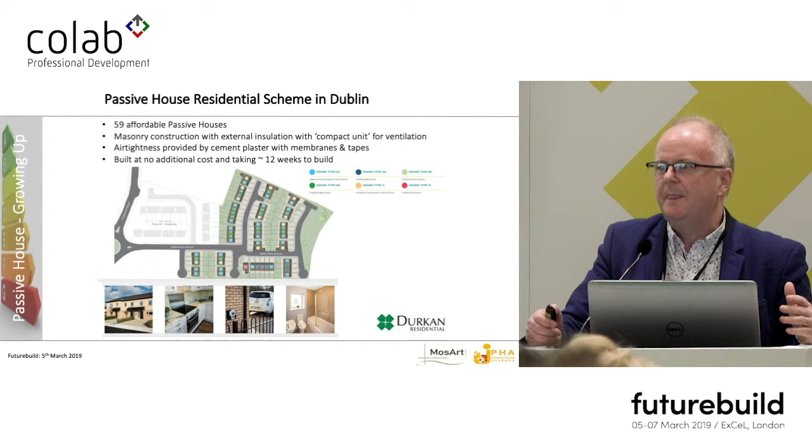And this is another scheme that we've done in Dublin. Again, what we're finding now is the developers are actually getting on board, and the developers now see this as a kind of prototype or model that's appropriate for their business model.

But what I'm really here to talk about is this Cornell Tech Tower. It's a 26-story passive house student dormitory in Manhattan. It's a very iconic building. It's in the middle of Roosevelt Island in the East River, so it's in a very prominent location.

The architects were Handel Architects, and the developers were Hudson and Related. You can see everybody listed there on the right-hand side.

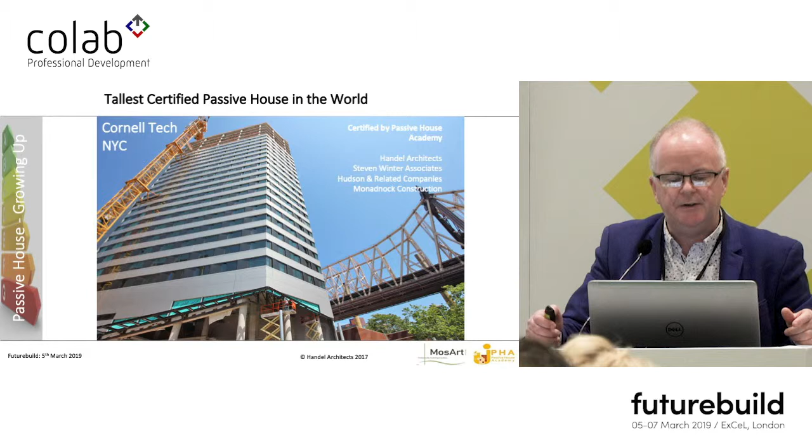So it's a 26-story building, 352 units. Some of these units are very, very small because it's a student dormitory, so you can imagine the accommodation in Manhattan per square foot is very expensive. So there's a good variety of sizes. There's an amenity floor at ground floor and also at the top floor, but otherwise in between they're all apartment studios and one bedroom. The 3-bedroom apartments are used by college staff.

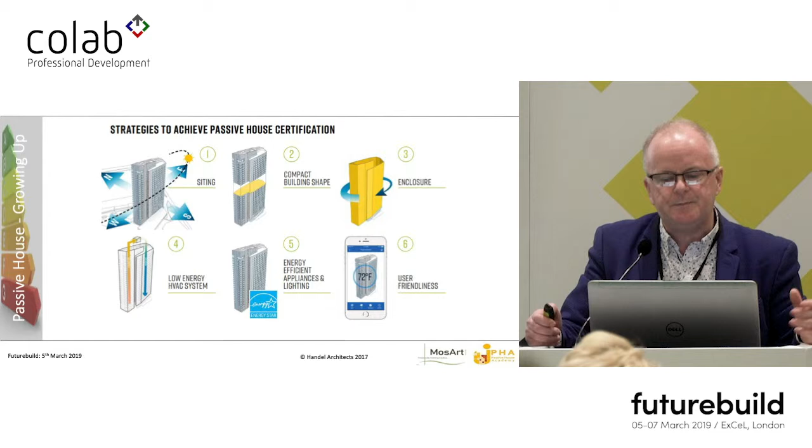A lot of you will appreciate the key facets of Passive House. Passive House is really all about the envelope, having a good form factor to reduce the amount of exposed surfaces as much as possible, and I'll go through these factors in my presentation.

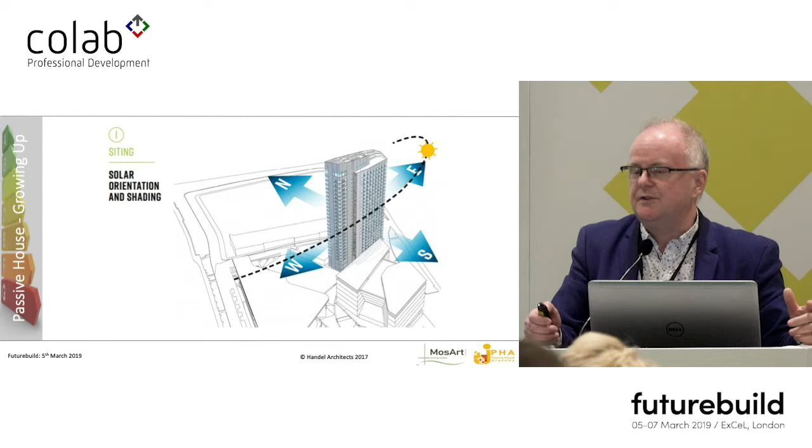Luckily enough, the island on which the building is built allowed for a southern orientation, so the widest axis, the front of the building faces south, and the east and west facades are quite narrow in width, so that's good because east and west present problems for overheating typically.

If you think about the surface area of your own home, if you live in a single family home, you have 6 surfaces through which heat loss takes place, whereas in an apartment building, each home has only one small surface area where you're losing heat. So it's far more effective, far cheaper, in fact, to build to the passive house standard with a big building than it is with a single family dwelling.

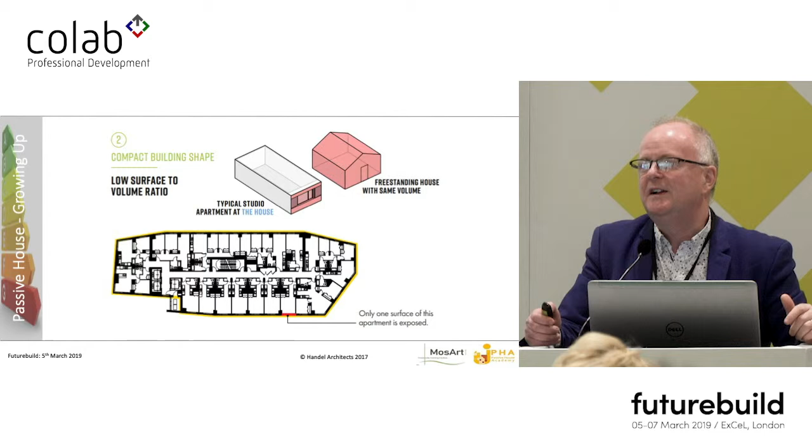And what we found actually is the insulation levels that you need in a tall residential building are actually less than you need for building code, which is kind of funny. So you get this incredible energy efficiency, superior air quality for actually a very cost-effective envelope.

So the U values that we used in the New York City building are on the left here, and the U values on the right-hand side are what we're going to need for NZEB, that's nearly zero energy buildings in Ireland, starting the day after Brexit. So we have Brexit, then we have NZEB, and then we have April Fool's Day, but we won't talk any more about that.

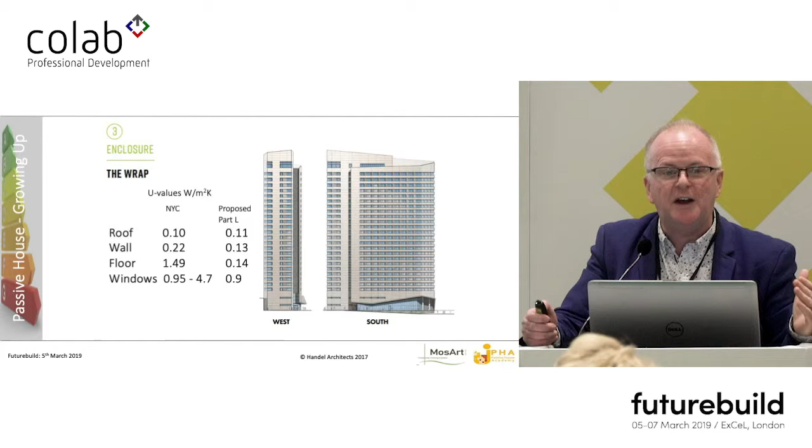But what's amazing, actually, if you look at the U value of the wall for the geeks in the audience, the U value of the wall of this building is only 0.22, which is actually not a great U value, but it's enough to meet the passive house standard, so everybody's happy. And despite that U value, we've reduced the heating and cooling demand by 90% compared to a conventional building.

It's in a really amazing location for a small firm from rural Ireland to be based, to be working on a project like this was really quite a thrill.

And it's right beside the river crossing there in the East River, and if you ever go to New York, make sure you go and visit and have a little nose around. I really encourage you to do that.

As I said, it's part of a Cornell Tech campus, so there's quite a lot of buildings there, and this tower is probably the most energy efficient residential tower in North America by a long shot. It's probably the healthiest residential tower in North America as well, and by no question it's also probably the most comfortable.

So do go and check it out. A lot of the envelope is essentially made off-site, made in Philadelphia, brought up by truck and then brought across the river by barge. So it's kind of like the most awkward situation you can imagine to pull a building together.

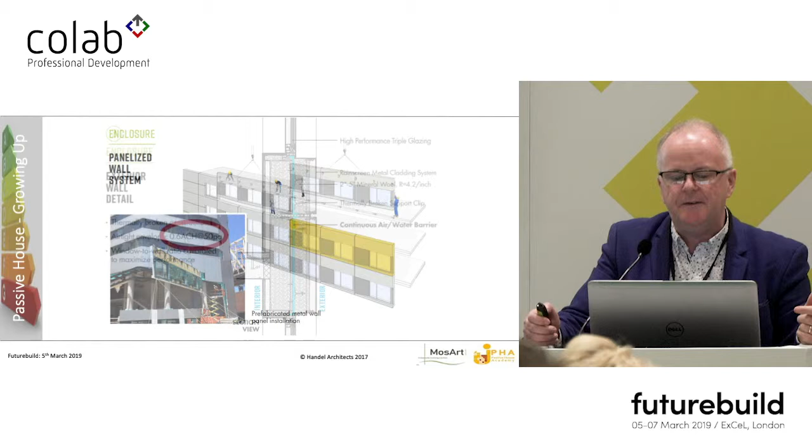And we were able to put up 6 of these panels in a day. And the panels came with the windows already fitted, the airtight tape already applied, the insulation already applied. So we weren't arriving with 10 million bits that had to be assembled on site. Most of the envelope was kind of pre-assembled.

The blue line that you see here is the weather-resistant barrier, so that's basically keeping the wind out and the water out. Our target for air changes per hour was 0.6. In reality, we got actually 0.15. So if you're interested in air changes per hour, that's the number we got. It's like tight as a camel's ass in a sandstorm.

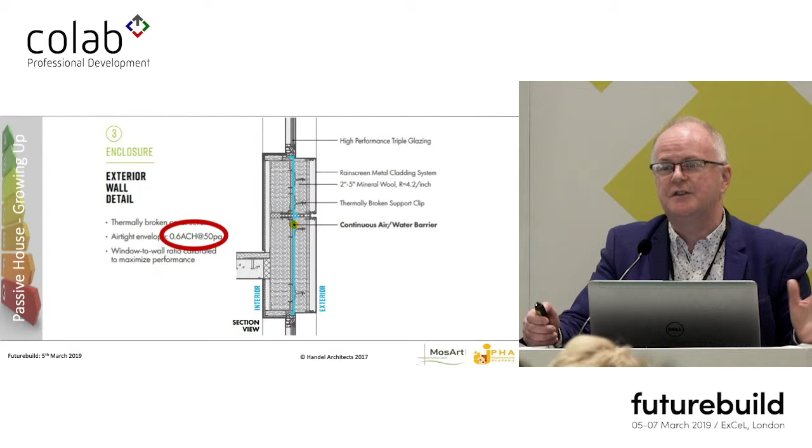It's unbelievably tight. One of the details that we like to apply here is the concrete column. You see the column is set back 10 inches from the exterior envelope. And the reason for that is so a big burly New York builder can actually get his arms in there and his hands in there to zip it all up, because airtightness is a really key objective of this project. So rather than the columns being out on the edge of the floor slab, they were set back in, which allowed us to stitch these panels together.

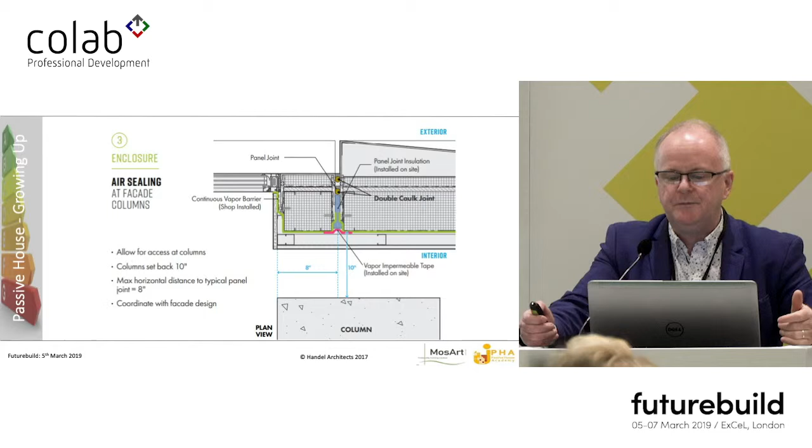You can see the panels arriving here. We had this idea that the panels would be completely covered in this airtightness membrane, but then we realized that some guy has to weld these panels to the edge of the floor slab, otherwise they might fall off and kill passers-by. And a building shouldn't kill people. That's kind of number one.

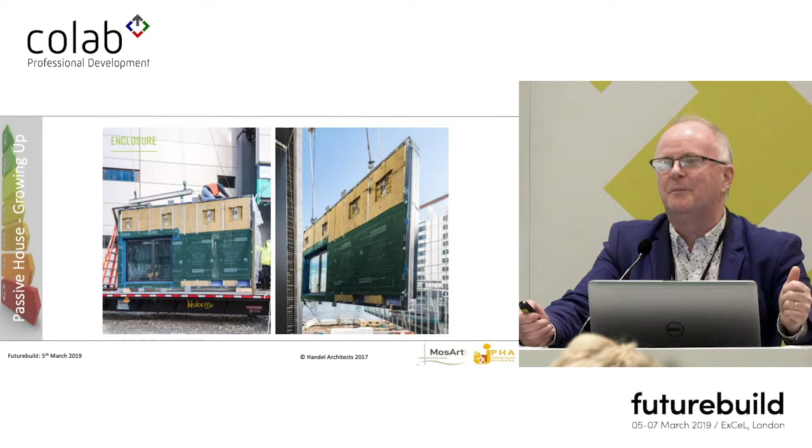So welding - these membranes are good, but they can't survive being welded. So we basically had to leave out some of the membrane so we could do the welding after. And you can see on this photograph here on the right-hand side, where we patched in later a piece of membrane over the bracket that was welded.

So sometimes, despite your best plans and your best ideas to do everything off-site, when you arrive on site, it's like, what are we going to do here? You can see on the left-hand side here, those of you who have magnifying glasses or binoculars, you can see that the column is kind of set in from the edge of the floor slab to allow people to zip it all up.

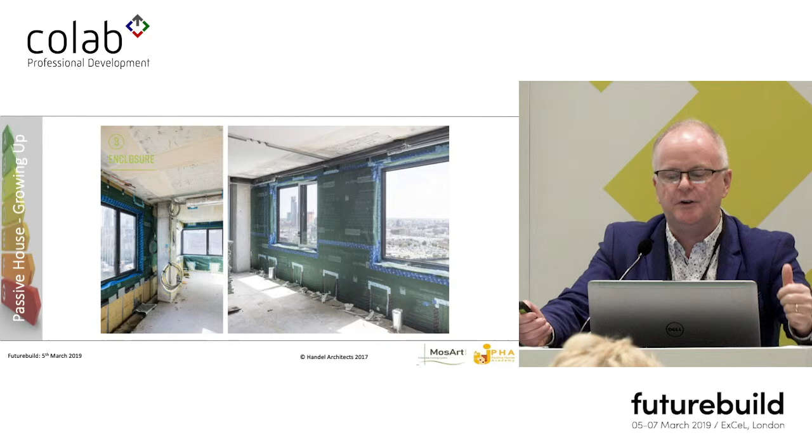So if you're into Passivhaus, effectively we're building a submarine. And you don't want to be that person who is responsible for creating a leak in the submarine. So we have this total kind of red line on the warm side, on the vapor side of the building.

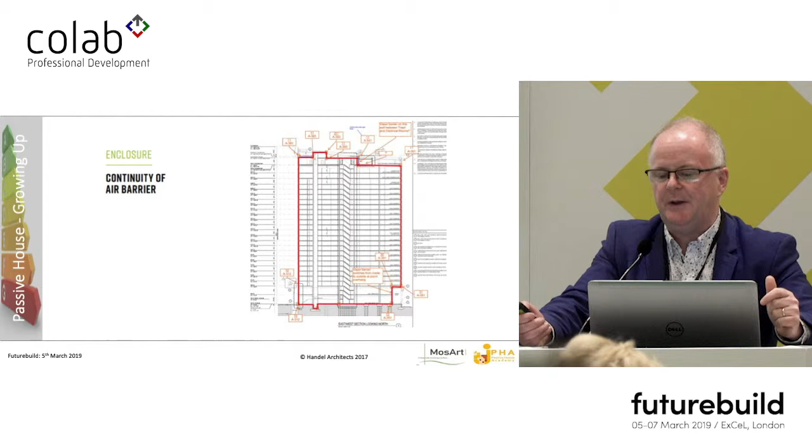And we did a lot of contractor coaching because the contractor had never built a Passivhaus project before. The architect had never done it before. The mechanical engineers had never done it before. So we basically wanted to make sure that we were going to get the airtightness level that we needed.

In a tall project like this, you're fitting the kitchens on the ground floor when you're still putting up stud partitions on the 26th floor. So you don't get an opportunity to do a whole building dress rehearsal airtightness test.

So we have an air permeability, and this is different than air changes per hour. In Ireland, currently you won't go to jail if you end up at an air tightness of 7, which is effectively like sleeping outside. For NZEB, we're going to go from 7 to 5. If you're less than 3, you have to have a mechanical ventilation system. For the Cornell Tech building, we got around 0.58 on permeability, let's say 0.6 between friends, and on air changes per hour we got 0.15.

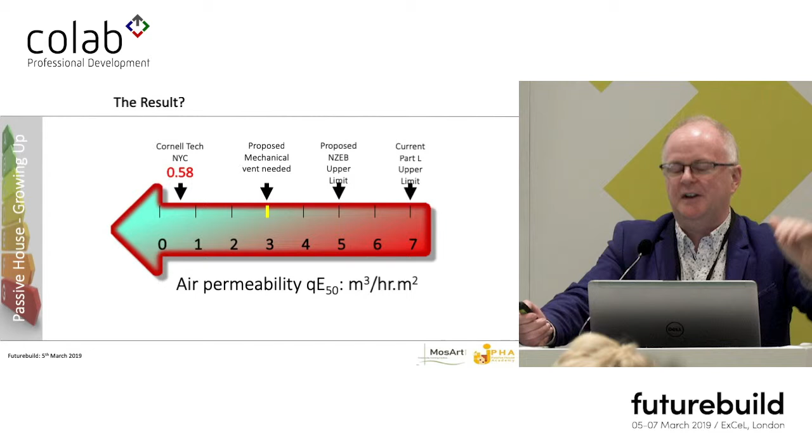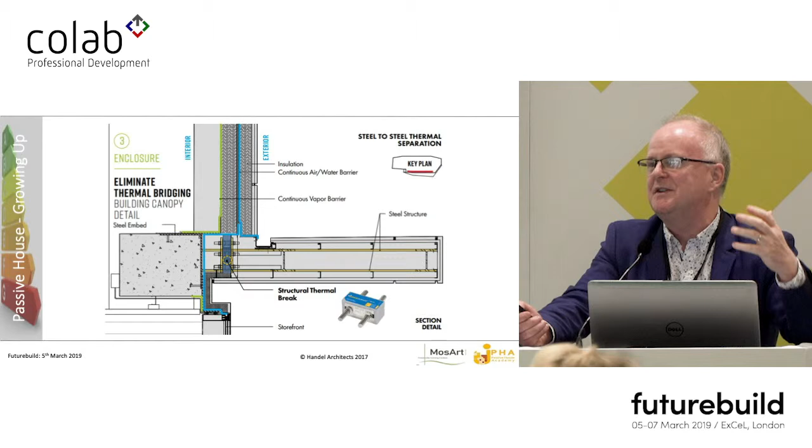And it was quite interesting - in North America, we're not used to using these materials. We're probably about 10 years behind in terms of supply chain. So all of these materials are looked at with a great sense of mystique and mystery. You know about the principles, you know about the theory, but to see it being applied to a massive building like this is really quite wonderful.

We have this kind of love affair with glass. A lot of modern tall buildings are covered in glass, which is kind of immoral, really - we shouldn't be doing that. It's the height of arrogance to have a fully glazed building, and we really have to move away from that. So this building sets down a marker: about a quarter of the wall surface is window, and that's enough, frankly - between 25 and maybe 30%. That's an important message that I wanted to make today.

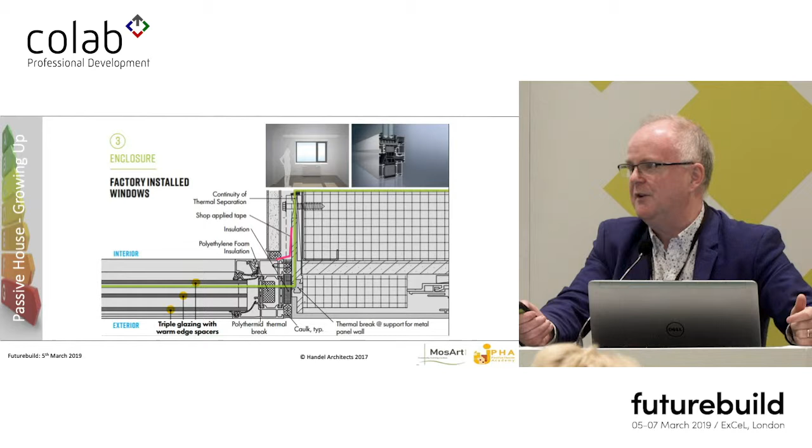The green line here is the air tightness line, the bottom of the page is outside, the top is inside, and basically everything is buttoned up. As I said, we're making a submarine, and the hip bone has to be connected to the knee bone, and the knee bone connected to the ankle bone, and so on. It's basically simple - if you can wrap sandwiches or wrap a Christmas present, you can make a building airtight. It's just common sense, but it has to be done right.

This is another view from the inside. This is when you need to do your first air tightness test - you need to do the whole building air tightness test when everything is still exposed. You can see it, so if you need to carry out a repair, you can.

It's such a stunning building, and I had the great pleasure of visiting it last July when I was over in New York for a meeting, and it was great to be back there.

The glass is pretty good in this building, 0.6 watts per meter squared Kelvin of U value, so that's really quite good. The frames are not great by Passivhaus standards - that's not to take from the project, it's a fully certified, beautiful, high-performing building. But the supply chain for high-performance frames in the US wasn't there 3 years ago. It is there now, but it wasn't at the time, so the frames are not as good as the geeks in the room would be used to, but that's coming on.

The solar heat gain coefficient is a very low number, you'll notice that. This is a very hot climate in July and August - New York is a very warm place. Normally, Passivhaus windows would have a solar factor of about 62, meaning 62% of the energy can make its way into the building. But that would have been too much for a building like this because we don't have any brise soleil, no external shades. So we effectively used a low solar heat gain glass and optimized that. It's not apparent from the outside - it doesn't have reduced visible light transmittance, just reduced solar gain. That was a very interesting thing to work on.

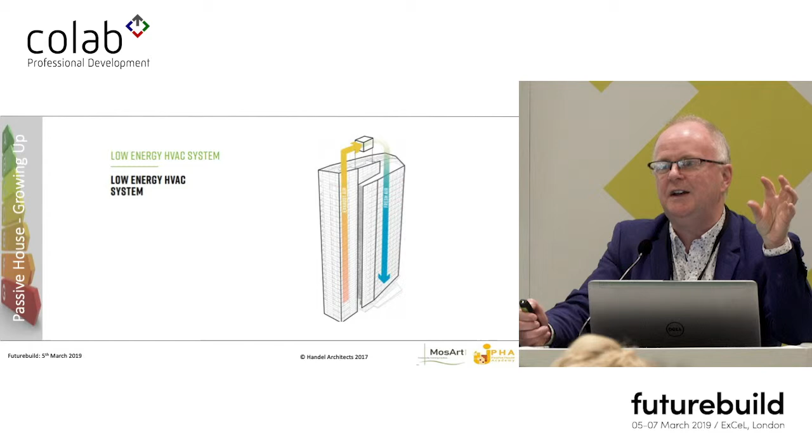In terms of mechanical systems, one of the main savings for a project like this is on mechanical systems. If you're reducing the heating and cooling demand by 90%, you can actually jettison a lot of the heavy, bulky equipment that you normally need to compensate for a poor envelope.

In terms of ventilation, this building is fully ventilated. There's about 16 air changes per day. So if you can imagine grabbing all the air in this building and dumping it and refreshing it 16 times a day, that's what it's like to live in this building. The air quality is extremely high, and it's provided by only 4 ventilation units, which are really quite modest in size.

The main ventilation unit that's venting the apartments is about the size of a skip—not one of those big low loaders, just a normal skip you might have in your driveway this weekend. So it's really quite impressive how we can ventilate a building of this size for this kind of population, because of how airtight the building is.

Those of you who are really interested in the numbers will be quite disappointed with the heat recovery efficiency of the ventilation units. Normally they're in the low 90s; in this case they're mid-60s, low 70s. This equipment was ordered and specified 3 and 4 years ago, and the supply chain is much more mature now. But even with those frames, which are not perfectly fantastic, and even with the low efficiency heat recovery ventilation systems, we can still meet the exemplary Passivhaus standard, which is very good.

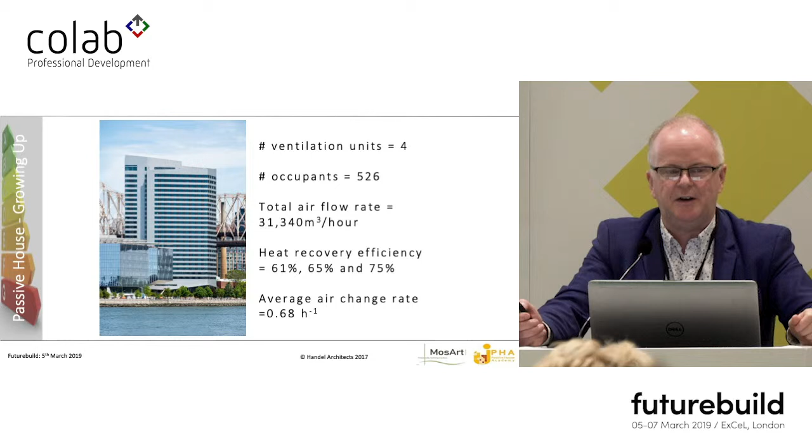In terms of heating and cooling, every apartment has a fan coil unit underneath the window. It's very modest in size, and everybody can control the temperature in their space, so they can cool or heat, and that's done with an outdoor condenser unit.

In the lower left-hand corner here, the original design was supposed to be a viewing balcony back towards Manhattan, and I guess a smoking deck and whatever students do nowadays outdoors in student dorms. But actually we had to make that the plant room, the external plant room for the air-to-water condenser unit. So the students can't go out anymore, which is a bit of a pity for them.

Each second balcony—one unit on a balcony does 2 north floors, and the next balcony up does 2 south floors—north and south, because half of this building could be heating while the other half is in cooling mode, since it's on a kind of north-south axis.

It's incredibly simple technology, simple insulation, like rock wool insulation, tapes, membranes and all that. It was really quite an amazing achievement for a team that had never done a building like this before, and we were very proud to be involved in this.

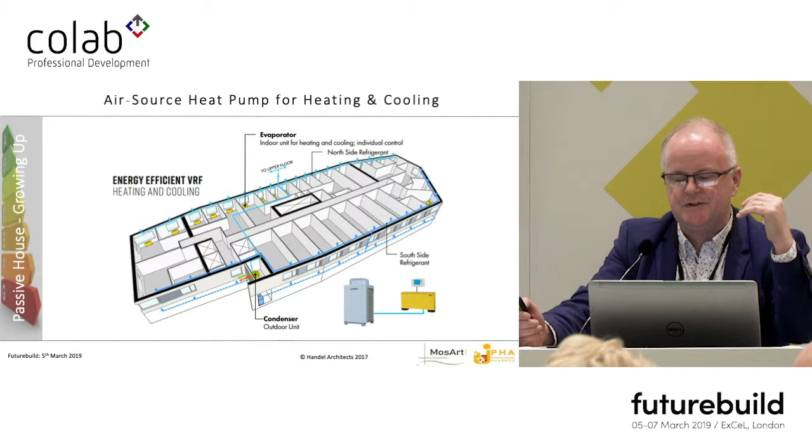I think it's a really good story. This project was built on budget. It wasn't intended to be a passive house building in the very beginning, so it's nice that it turned out to be a certified passive house building on budget. We were very lucky to be involved in that project. We trained the architect, we trained the contractors, we did all the thermal bridge modelling, we did the PHPP model. If there's anybody in the room involved in a tall building or who'd like to collaborate on a large project, residential or commercial, we'd love to hear from you.